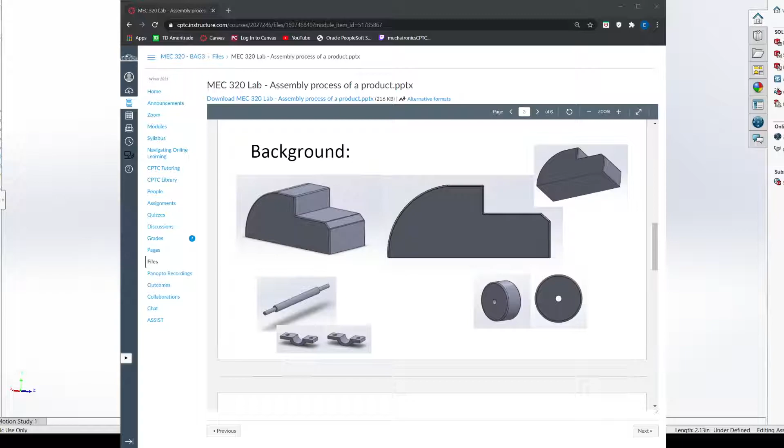So if I get rid of this window, we go over. This is what the car looks like fully assembled, assuming there are 4 brackets instead of the 1 bracket. This was just to help give a visual of what it looks like.

So if we go down and look at the clip, this is the clip solution I came up with. Instead of using bolts and screws and fiddling with a bunch of parts, we have 1 part, and it has a fishhook type solution to it.

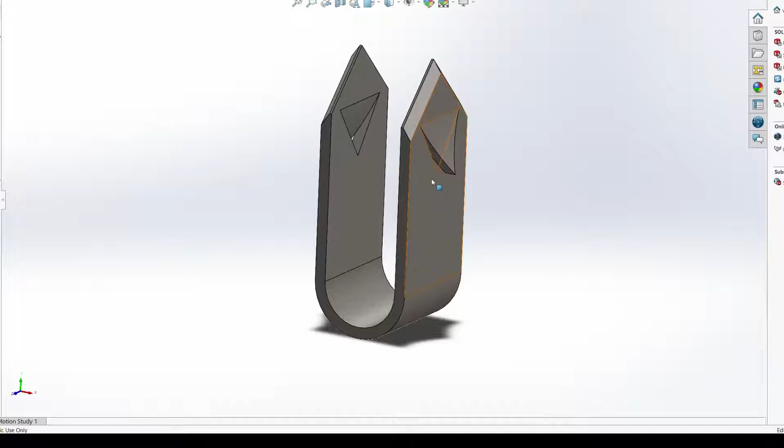It's a softer wood, since it's a toy car, so generally there's a little bit softer wood. I figured if it pushes in, it won't pull out, it'll just dig into that wood. I didn't want to use a straight screw or staple gun, because for a kid, if it pulls out, that's not good since it's a sharp object.

And glue doesn't always stand the test of time, unless you came up with the right glue. So I figured this one gets in there and stays sturdy.

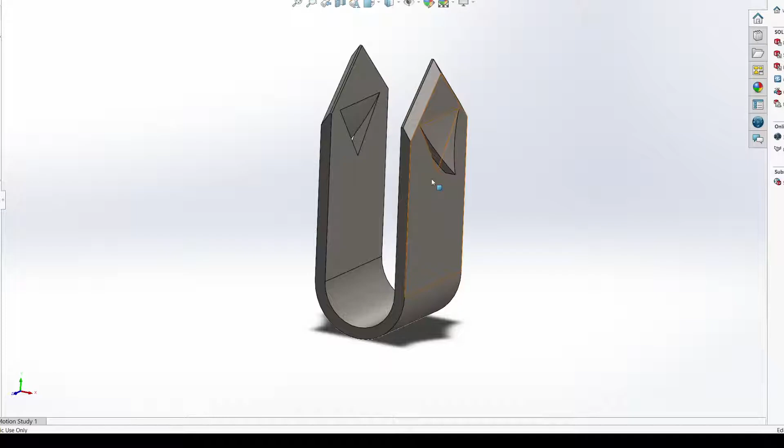So if we go down to the assembly, this is first the semi-automated assembly. The basic goal is to place all the parts and push the button. Once you push the button, it does everything.

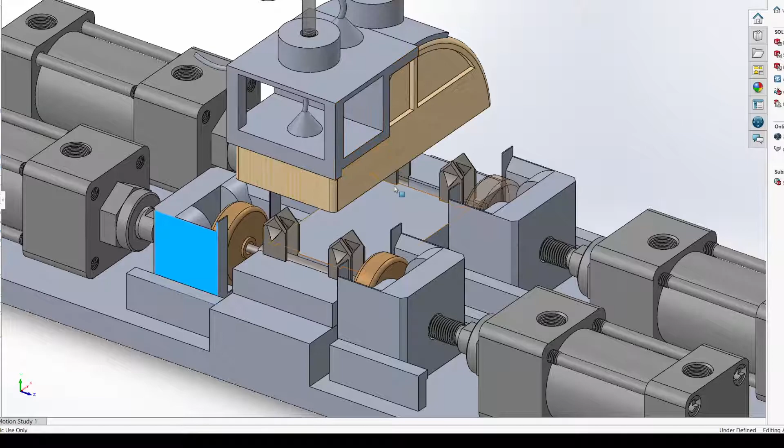So the vacuum is always on, and there possibly needs to be a membrane in between to help create good suction on this car. The car gets placed in that spot, and then it's on pneumatic rams, which push it down.

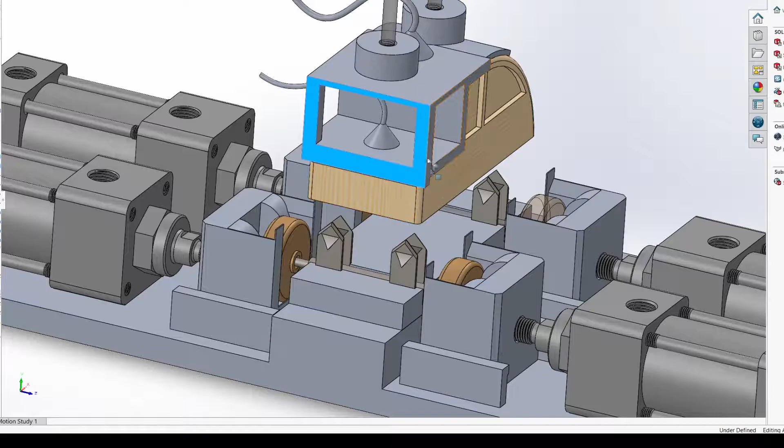Things aren't quite fully made yet, but so it gets pushed down. Once it sits on there, it stays fairly stable. When it's putting pressure, those hooks will allow it to stay stable, and it'll be able to fully complete the press down. There are 2 actuators to help even further stabilize the pressure coming down.

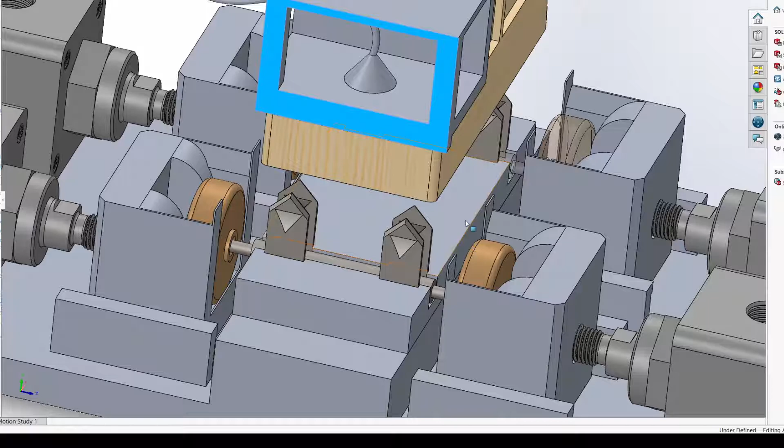So that's how that gets placed. The next part, those clips just slip right in. You've got 4 clips that stay stable on the vertical walls, and the axles get placed over them. I think I made it invisible or transparent here, so you can see how it fits.

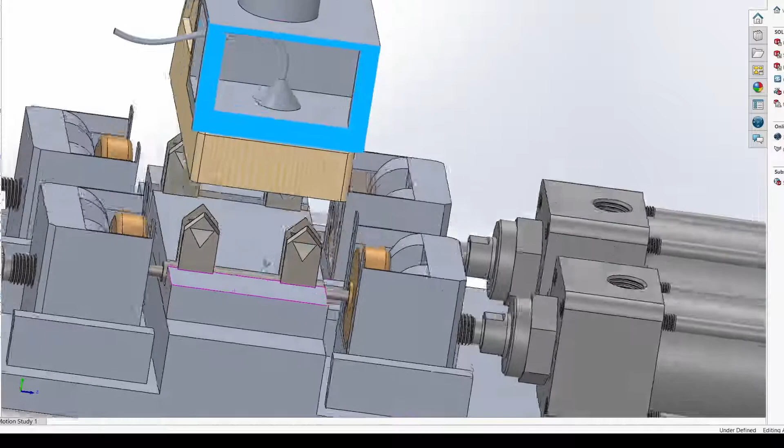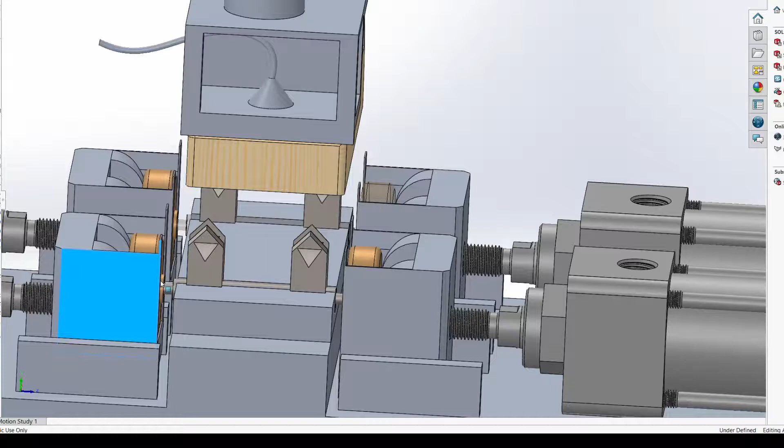So those fit in, and then the wooden wheels slide into there. Once everything's placed, that gets pushed down, and these in their resting state would be pushed all the way out for when you slide the wheels in. Once the wheels are slid in, everything pushes in, and that pushes down. When it pulls back up, it pulls the whole assembly out, everything gets reset, and the car is fully assembled.

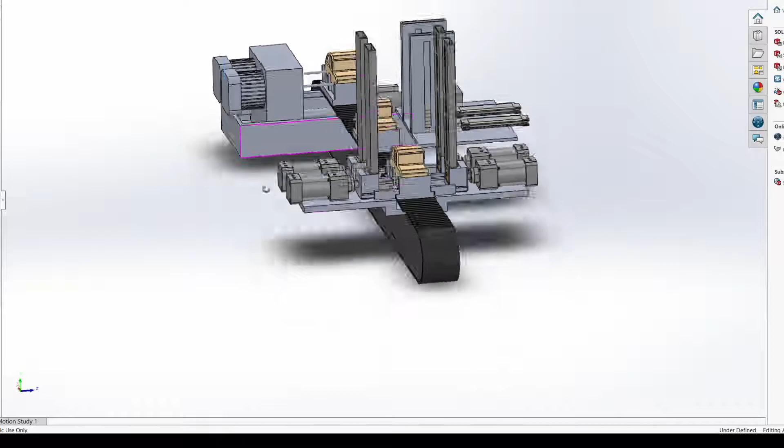So that is the solution I came up with for the semi-automatic car. Now if we go down to the fully automated process, as you can see, I went away with the bracket on this one.

Looking at all the toy cars I came across, I went into the store and was looking around the internet. Everybody's doing drilling holes through, and I was like, nobody's doing brackets, and the brackets honestly won't add any value. I don't think somebody's gonna choose a car with the bracket over one without it. That's not really here nor there, especially with the amount of processing it would take to assemble the car.

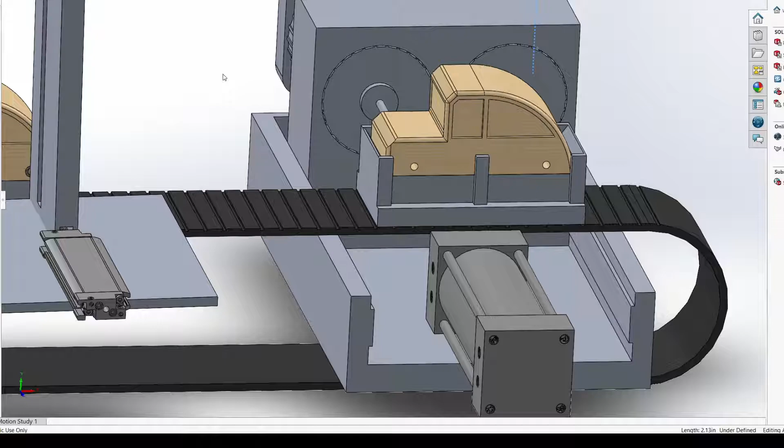So with that said, the first part of the process on the conveyor belt, or the line, is two motors that slide across a kind of jig that's attached to a pneumatic or hydraulic that will slowly push in. If you look at this plate, it prevents the car from pushing over while it's drilling through, and it does the same when pulling back, preventing it from pulling out of the jig.

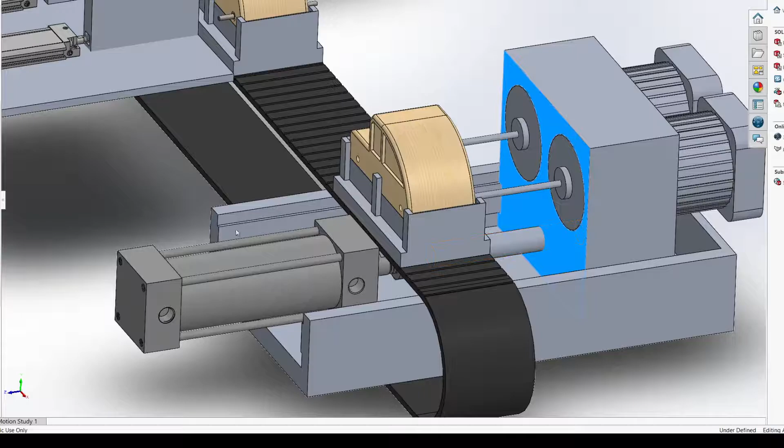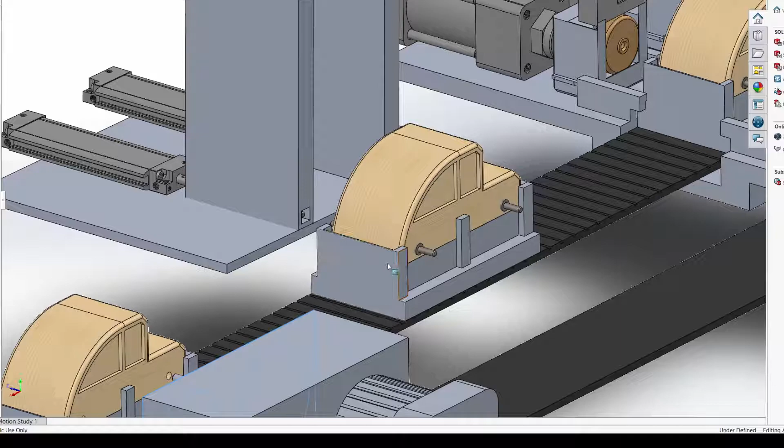So once that car gets placed in, it does the drilling, and then we go to the second process, which is pushing the axles in. There's two pneumatic actuators, assuming you control the speed so the axle doesn't go flying out the other side too fast. You push it into place at the distance it needs to be, and then there'll be little magnets underneath in this plate that'll hold that bolt in place.

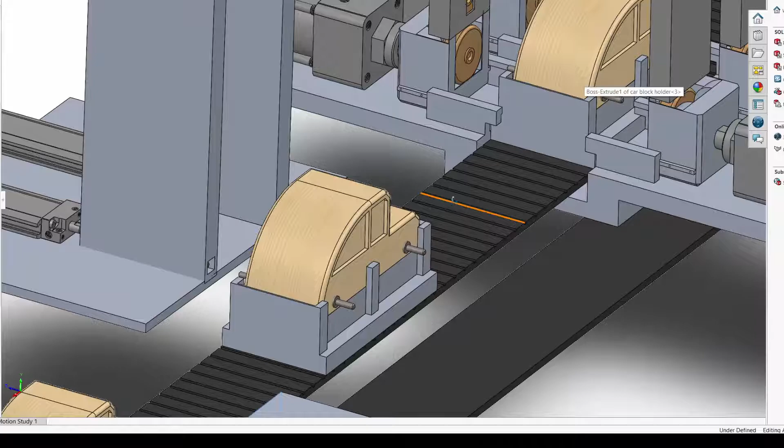The wood's not too thick right here, so that magnet will be able to get a strong enough hold on that axle to keep it relatively stable as it works its way down the line. Also, those axles are in kind of like a magazine thing. So it works its way down the line to the third process.

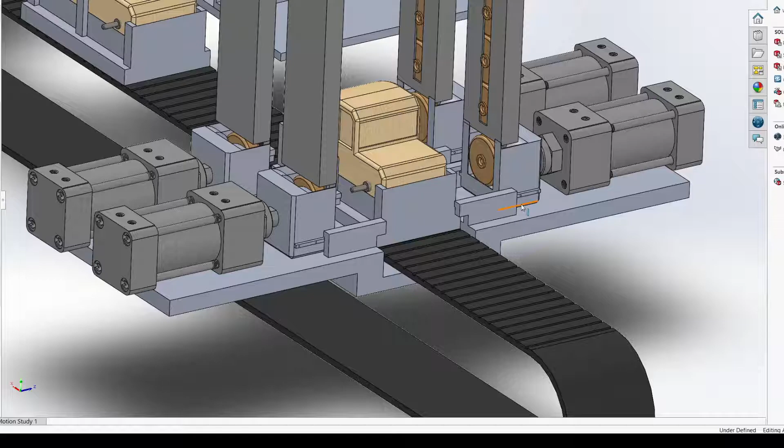In the third process, you've got the axle in there, you've got the car placed, and same thing where there's a magazine. Most likely there would be two little things to help control how the wheels drop into place—right now it wouldn't be ideal without those, but I just didn't add them into this assembly line. So the wheels are controlled, they drop down, get placed, and then, kind of like the semi-automatic, it pushes in. If it pushes in at the same time, the axles will stay relatively centered until it gets fully pressed in, and then everything will center up.

If you look here, it is chamfered on both sides, so if it's a little bit off, it'll self-adjust and be able to push in.

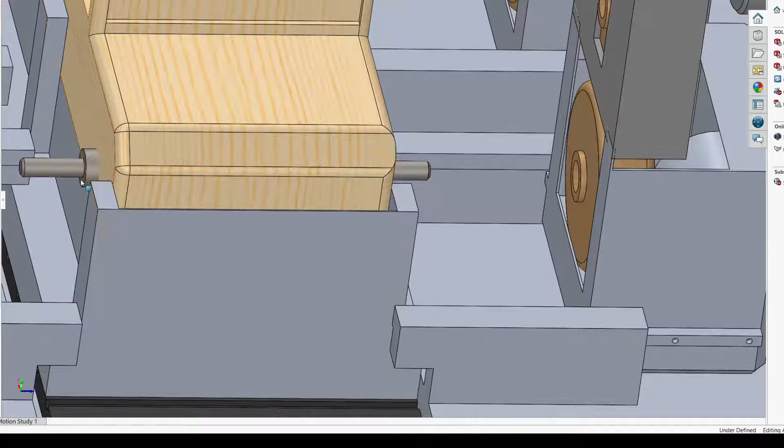Instead of doing washers, because washers would also be a pain to automate, I just kind of put it in a little thing, so the whole wheel's not rubbing against the car. If it gets a little side to side, it's not a high load bearing part—there's not a whole lot of pressure being applied to this product. So this would be a good solution instead of actually placing washers in. And with that said, that completes the assembly line, and thanks for listening.